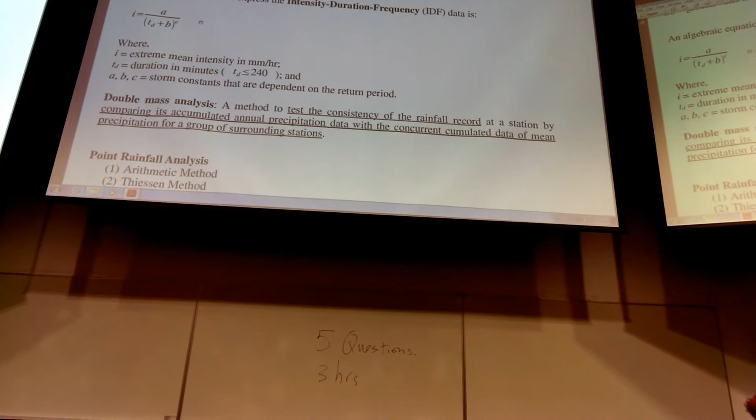For intensity, duration, frequency, that information is exactly from the DSD manual. Well, you don't have to worry - of course, you can write down this kind of equation again, or if necessary, I may also provide it in the question. The question is mainly not to trick you or to check whether you can memorize something.

The double mass analysis, well, we have it in assignment number 1. One thing I'd like to mention is that someone asked me, and I may have misunderstood your question, so I'll try to explain this, and later I'll show you the assignment number 1, how we did the calculation. But actually I marked some of the assignment number 1s, and there shouldn't be any problem so far that I can see.

So I think most of you are okay, but maybe some other students just copied and still had no problem. What I want to say is that we're trying to compare, to check each of the stations with the surrounding stations. But if there are, for example, 20 stations, you don't know whether within those 20 stations there's only one, or maybe 2 or 3 stations with a problem, or even maybe none of the stations have any problem.

So what I mean is, when you plot the cumulative curve and you see the slope change, okay - you can always use all the stations and do it one by one, or pick one, for example station number 1, and use the rest, stations 2 through 20, the other 19, to do the cumulative curve, and plot one by one. Then the next one you use station 2, and the rest to do the cumulative, and you see the trend.

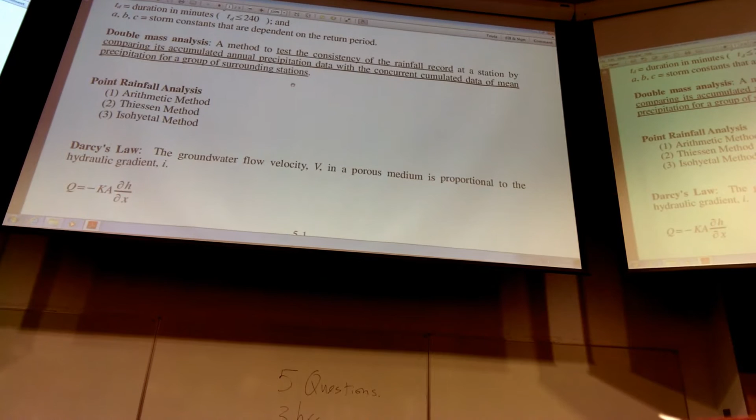18 are fine, and you just pick the one with the problem. Then you use the rest of the stations to do the cumulative curve. You eventually include the other ones with problem as the cumulative. But what you can do is plot all the graphs first, depending on how many stations. Like in our assignments where you got 5, you do all 5 first, then identify which one, or maybe 2, have a problem. Once you identify those 2, you don't use that data for the cumulative stations with data, so you can isolate the one that may have a problem. When I talk about the assignments, I'll show you again, but remember you compare with the surrounding stations.

Now this, well, it's hard to say. Anyway, remember how to make use of this method to find the average rainfall. So this, I cannot rule out.

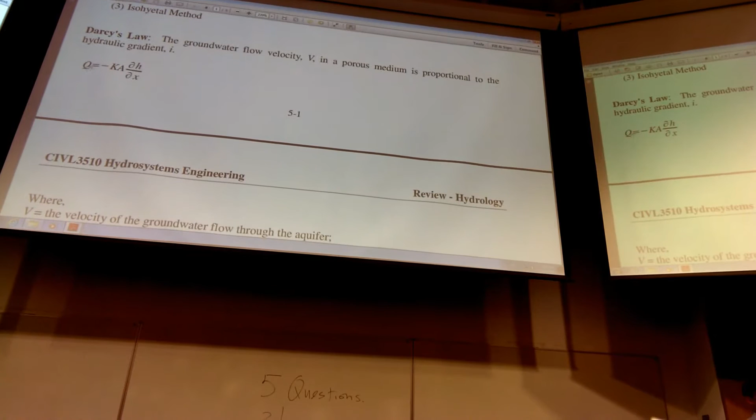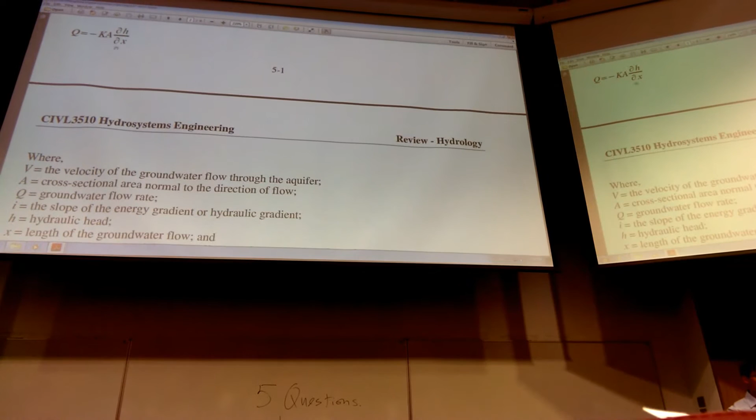Darcy's law is very important. This already includes the continuity equation, V times A equals Q. Without the A, so that is the energy head, the energy gradient, and that is the coefficient for hydraulic conductivity. Remember this negative sign, or sometimes we don't put the negative, depending on whether the head in the next stage, in the final stage, is smaller. If it is smaller, you put the negative sign to compensate for the negative sign coming out from here, since it's decreasing. That's why we put the negative sign.

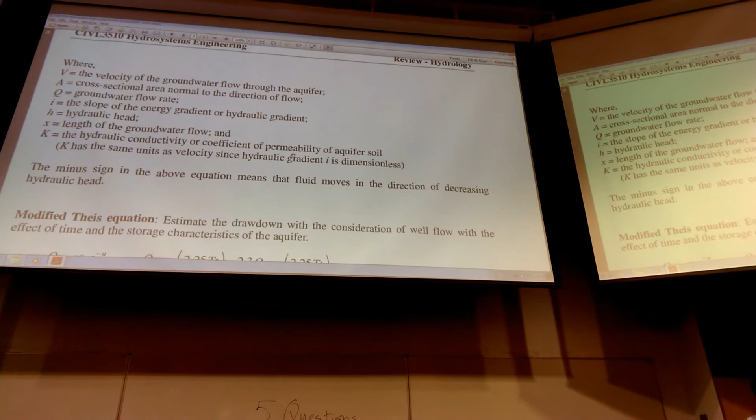You need to review all this, and remember we have different names for hydraulic conductivity or permeability. If you just get used to one term, and in the questions you're given the term 'permeability', and you don't know these two actually mean the same thing, you may have a problem.

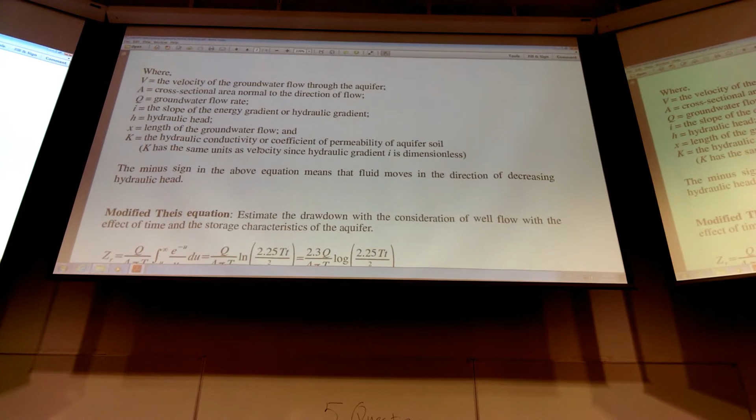Also, the other thing is the unit, the units of some of the coefficients. It's better to just make it clear. I don't write it down here, so you need to refer to your notes. That's the reason I just play it safe, that everything's in your notes. And more than that, you should do some outside reading.

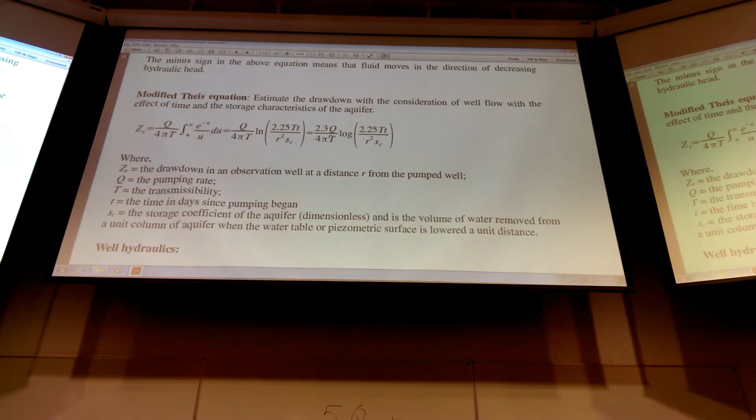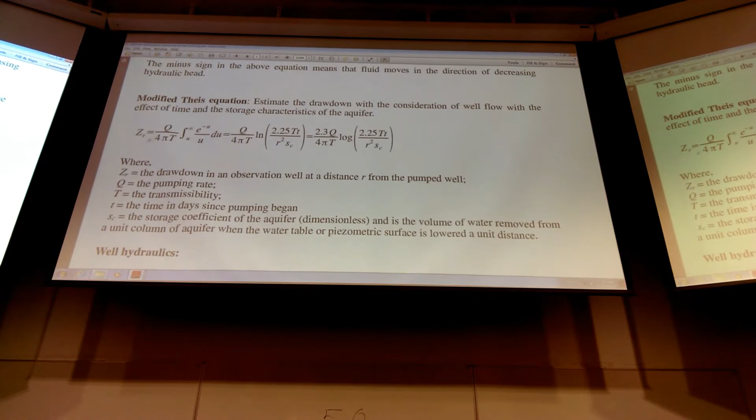These equations estimate the drawdown and how it's related to the flow rate extracted from the well, and also the time. Mostly we use this to estimate, given a certain amount of time, with this specific flow rate, what would be the drawdown. Or maybe you can only allow a certain drawdown, and you want a certain flow rate, and you need to know how much time, or when this will occur. So we use this part of the equation.

In well hydraulics, mainly the confined and unconfined cases, you just write down the equation, remembering that from the tutorial, whether you have 2 observation wells or just 1 well. At the boundary of the well you get 1 boundary condition, and the other boundary condition can go to a certain distance away from the center line of the well, where the drawdown is almost 0.

But of course, when we derive this, we assume that at a very long distance, approaching infinity, the original groundwater surface won't go down. But if at a distance of about 500 meters or 1 kilometer away from the extraction point it's already not affected, then you know how to calculate or define the depth of the drawdown, or the depth of the groundwater.

The other thing you need to worry about is the unit. This should be the SI unit. Again, as I mentioned, I won't ask you English unit questions. If necessary, I'll just change it, or I will only ask the question using the SI unit. But again, you need to know the most fundamental, simple conversions.

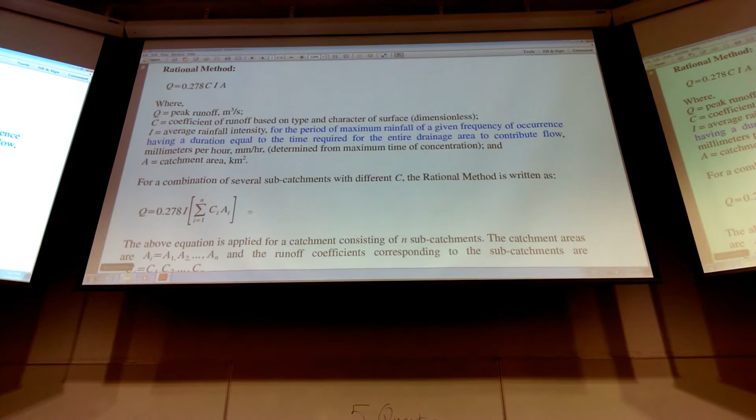These two equations you can find in the notes, and also in the DSD Stormwater Design Manual. So just think about how to use it.

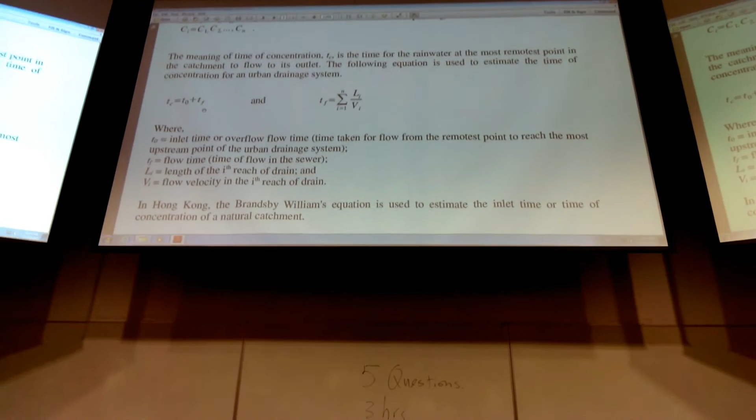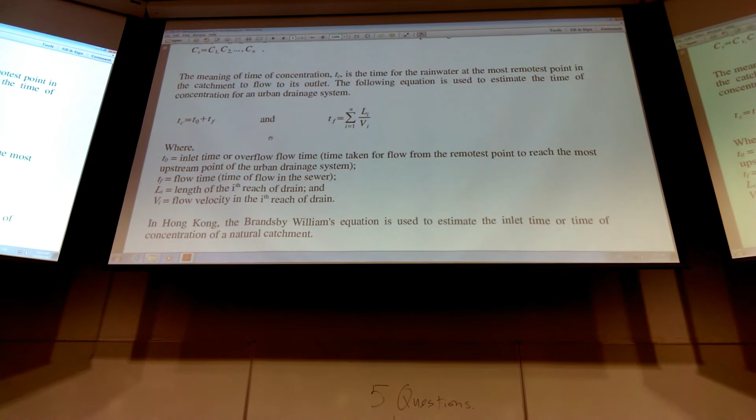It's a very simple relationship between slope, velocity, and n, if you are given the minimum velocity, for example 0.75 or 0.8 meter per second. Then you need to satisfy that. You can start with that as a condition when you do the calculation, then change the slope using the Manning equation, and define the Manning n, which is usually given for different conditions.

And the time of concentration. Remember, I spent a little time explaining this, the rainfall intensity, but that is related to the time of concentration. Quite a number of you came to ask and clarify the concept. So remember, the most remote point - how much time does it take for a drop of water from the most remote point to reach the exit.

It takes a certain period of time, depending on the topographic condition, and whether it goes into the pipe, then to the manhole, then another pipe. So the flow time and the overland flow time altogether - anyway, you get the time.

That time should be the longest, amongst the catchments, or if you have a number of smaller catchments. So that time we equate to the duration of the rainfall.

If you know the duration of the rainfall using the intensity-duration-frequency curve, then you can find the I. You can find the I.

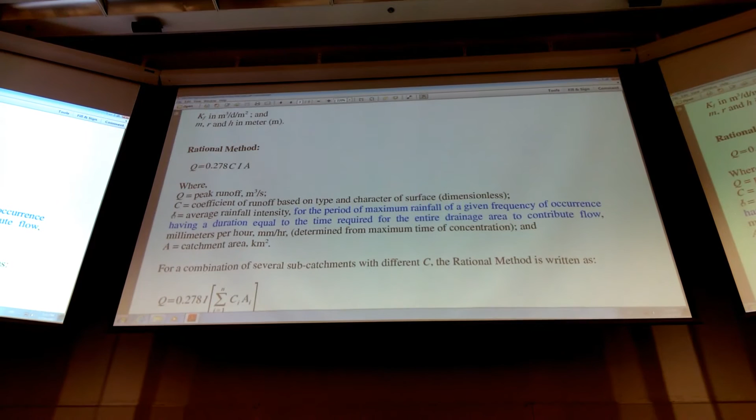But the main idea is that we equate the time of concentration and the duration of the rainfall. It means that over that period of time, we just assume the same rainfall intensity occurs, constant rain distributed on the whole catchment.

So then you get a more conservative result for estimating the flow Q. Think about it: if it takes 30 minutes from the most remote point to the discharge point...

But the rain only lasts 15 minutes, just half. If you use 15 minutes to estimate the I, then it will be different.

And the other thing is, if it really rains over 30 minutes, even longer, then the most remote points have already contributed to the exit point. So it doesn't really matter if it continues to rain for 1 hour or 2 hours - if everything else is the same, then the same amount of flow will arrive and contribute to the outlet point.

That is the main point. That's why we equate - we need to find the time of concentration first, then make it equal to the duration of the rainfall. Then you find the I - that's the main idea.

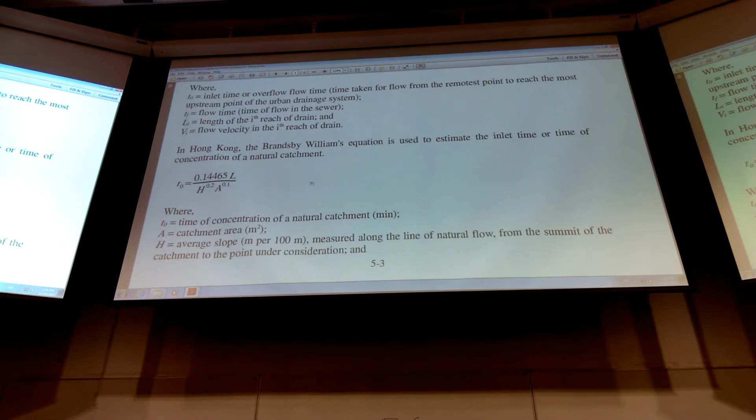These equations you can use for a catchment with a given length, slope, and catchment area, to give a rough estimation of the time of concentration. It means you go to the inlet point.

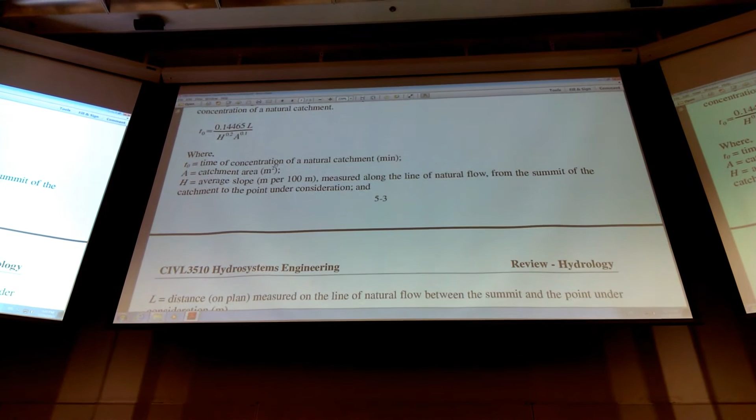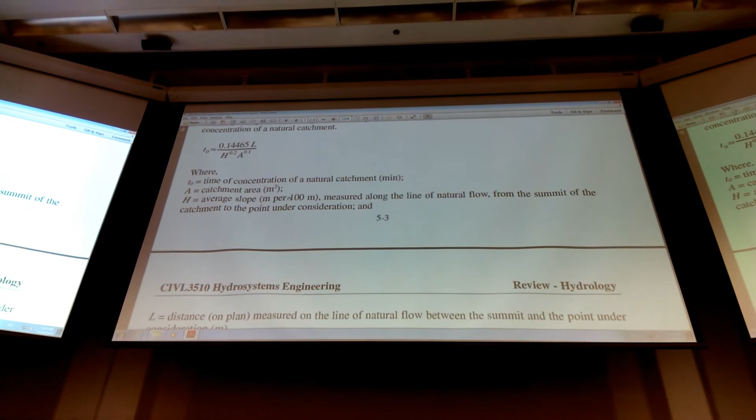But once you go to the inlet point, you also have the time of concentration if you have a composite or different small catchments, and you use a number of pipes to connect them together. Then you still need to identify the outlet point and the total time of concentration.

In the case that you get a set of data, or are asked to calculate the return period or even frequency - we have a list of rainfall data, for example over 50 years: the largest one, second largest, down to the smallest one.

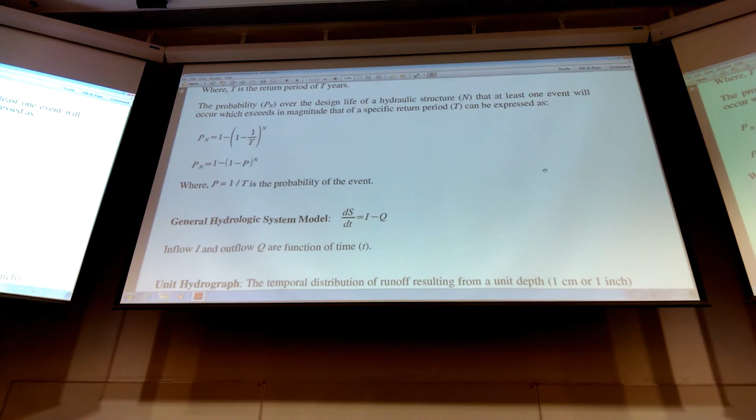Now, according to the DSD manual, you can probably identify the locations for your design. Then maybe you can select a 50-year return period or 25-year return period. You may be required to apply an equation to calculate the return period. Once you have this return period, then you use the IDF graph to find the rainfall intensity. In other words, you are not given the rainfall intensity directly.

I just want to show the figures - the rainfall intensity figures - showing the time, the durations, and the rainfall intensity.

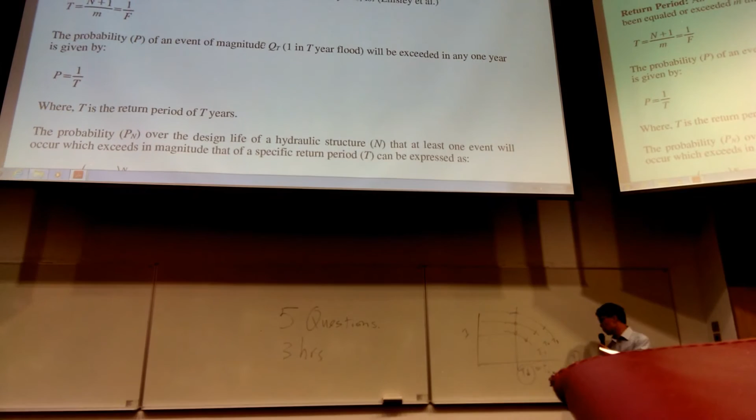There are different curves, remember, for different return periods T1, T2, T3. What I want to say is that I just asked you to do the calculation, but the return period is not given. Then you may ask whether you use this curve or that one, even though you know the duration equals the time of concentration. So you will ask whether you use this point or that point. Then maybe you can use the given information to calculate the return period.

Now, for the case where we have 50, 35, or somewhere in between - just like when you use the Moody diagram - you can approximately find the value. If it is this one, then you find it here, and find the rainfall intensity. Then you can carry on to use the rational method.

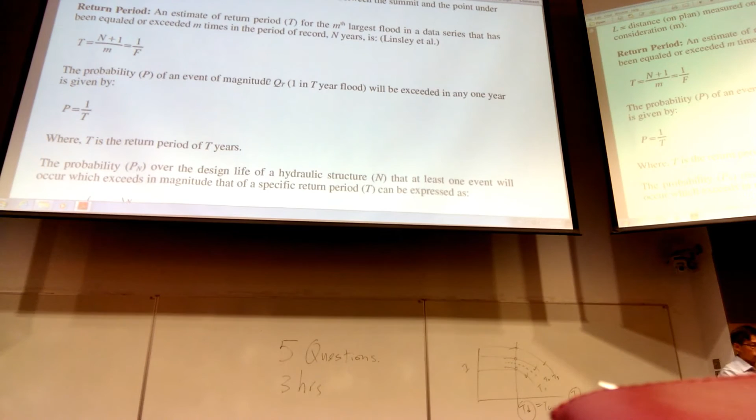Now for the unit hydrograph - I don't include the table here, so you just need to know how to derive the unit hydrograph. The unit hydrograph is related to the time interval. So if you get flow data with a time interval of 6 hours, then what you derive is the unit hydrograph for a 6 hour interval. If it is 2 hours, then what you derive is for a 2 hour interval.

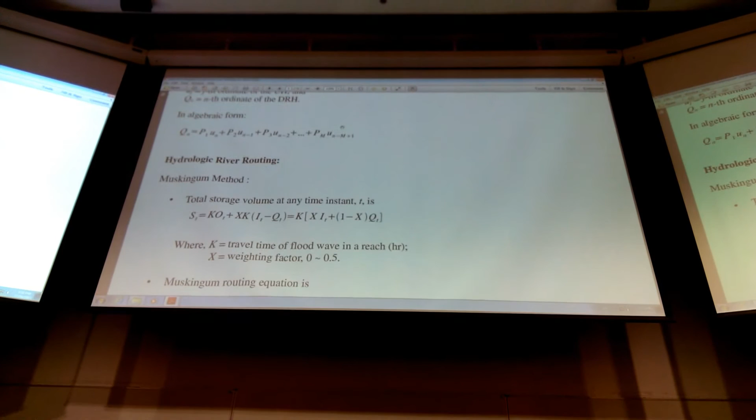Then, when you apply it in a later case, for example using the unit hydrograph to derive the direct runoff - we have the example - you need to match with the time interval, for the direct runoff hydrographs. It's also required that you review this.

As I mentioned, for the river routing, remember all the equations. Just check and make sure you write the equations correctly - don't miss out anything. How to find K and delta T.

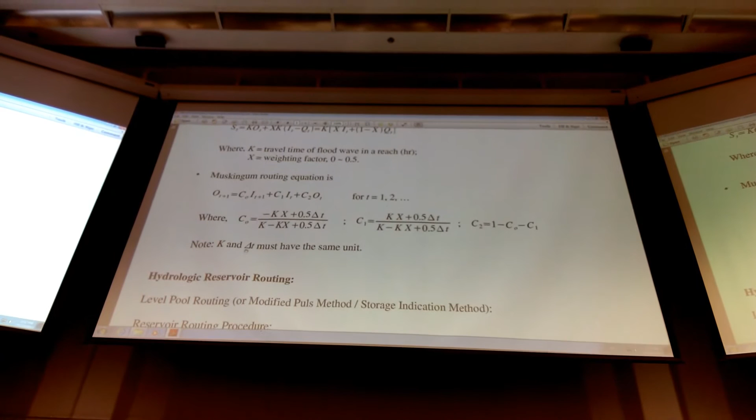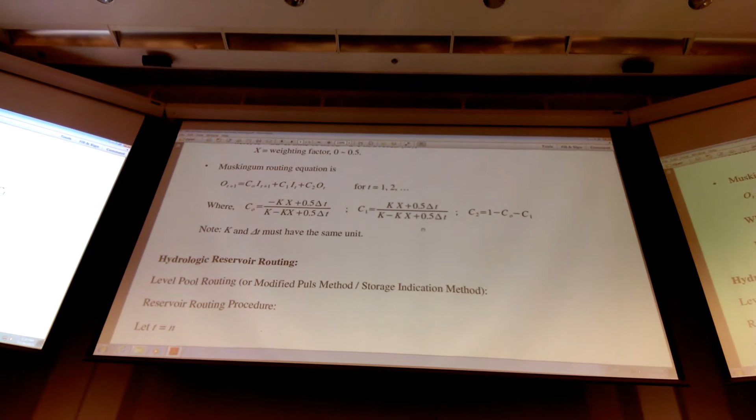So in your assignments, most of you actually did quite well, so there shouldn't be any problem. I will go through that. And for the reservoir routing, remember all those equations - mostly you need to use the table to work out the result.

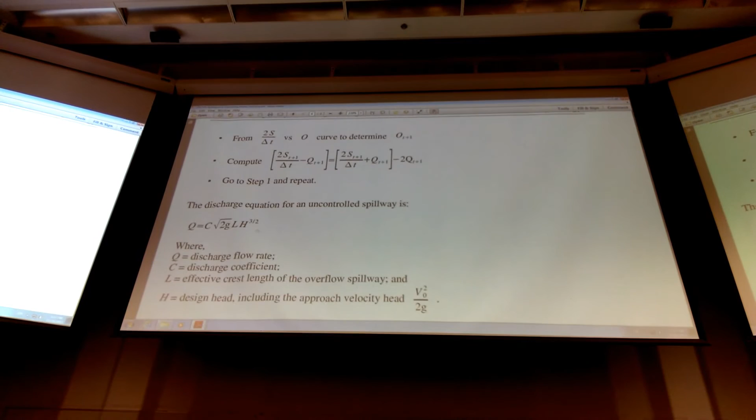For the discharge, I also include one equation here. It doesn't mean the other equation is not important, because this one shows you the stage - the flow rate and the depth. So maybe you are required to use this information to link with the reservoir routing. Remember how storage relates to the water depth, and how that relates to the outflow. You may also require this information as well.

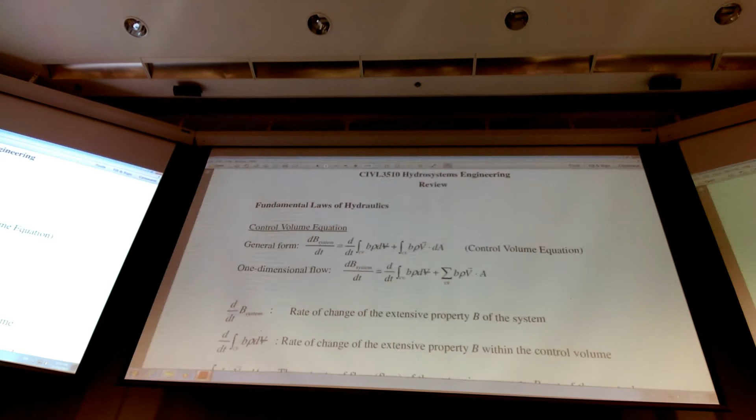For the hydraulics, I will ask questions that are more practical rather than too theoretical. Even though the examples included in this chapter on the fundamentals of hydraulics look a bit complicated, the reason is simply because of the unsteady term.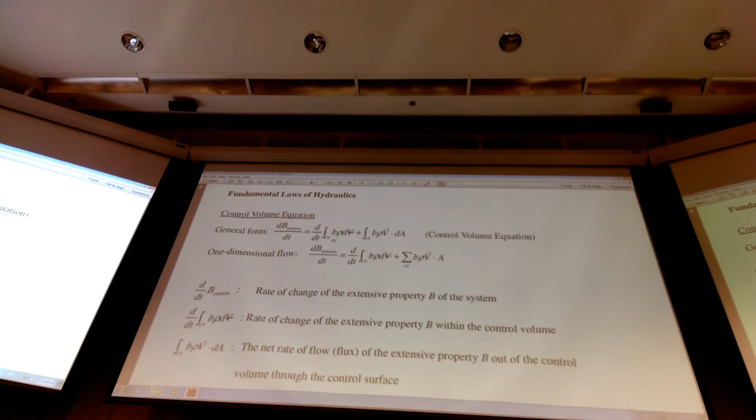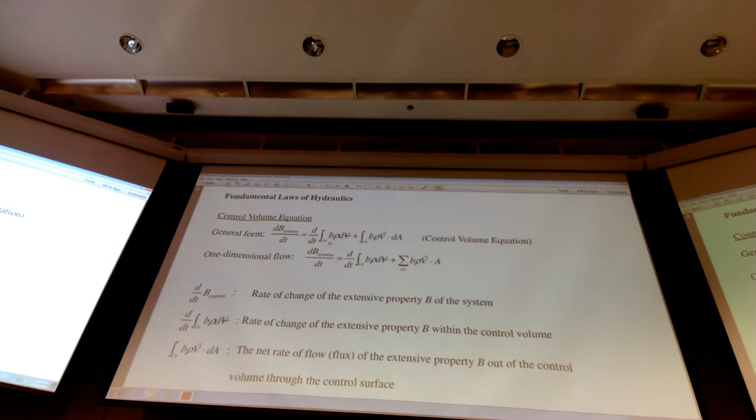But when we do the real application - pipe flow, except for transient flow - we can, to a certain extent, consider it steady. Can you remember that once we design the control volume, which moves at the same speed as the wave or the pulse, we change it to a steady case?

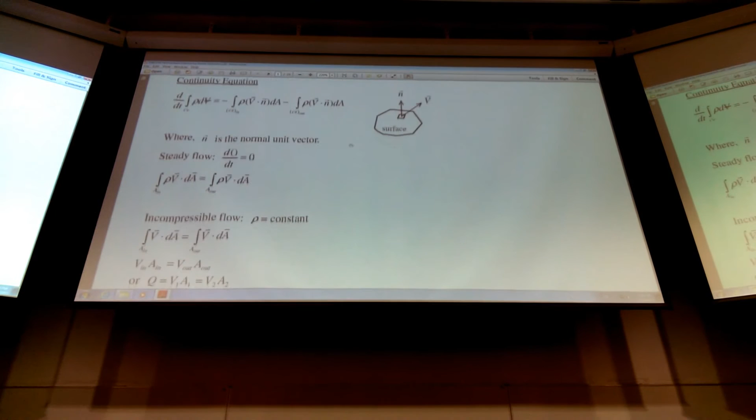So mostly you deal with the steady flow situation, pipe flow or open channel flow. But still, I think you should also review this chapter - write down all the equations, the continuity equation, which eventually reduces to a very simple form, and the momentum equation as well. I mentioned to you, just by this example, that I'm not going to include this in the version I upload to the campus.

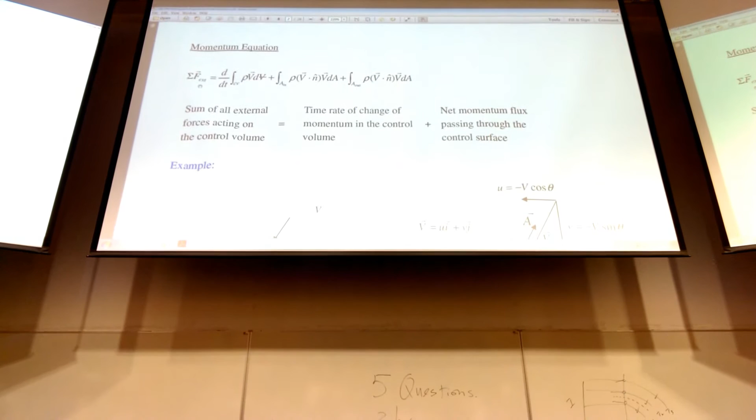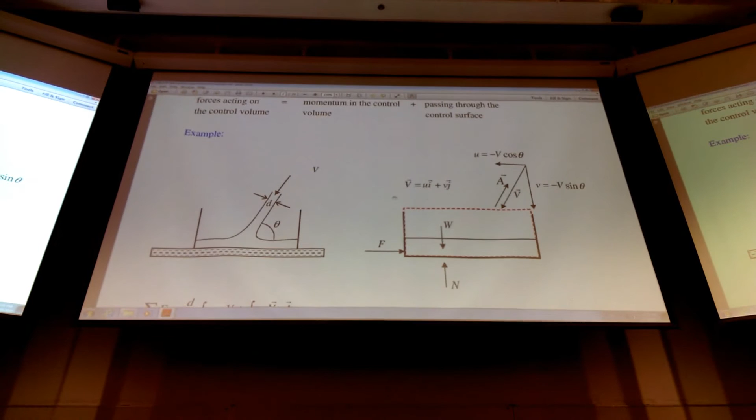This one I already explained to the class, so just a reminder, I'm not going through it in detail. The two we have here: one is related to the total mass flux, and the other is related to the direction of the force. This example demonstrates that if you consider the x component, there's a velocity v component in this direction. But when calculating the total mass flux or total flow rate, you don't need to use this component. Remember, this is to remind you of the momentum equation.

The energy equation is very useful. Remember the pumps, whether we have a turbine, and the correction factor. I won't ask you for cases requiring a different correction factor, so you can just assume it's equal to 1. But for real applications, remember this is not the only equation you universally apply, so you've got to be careful if the flow is not turbulent but laminar.

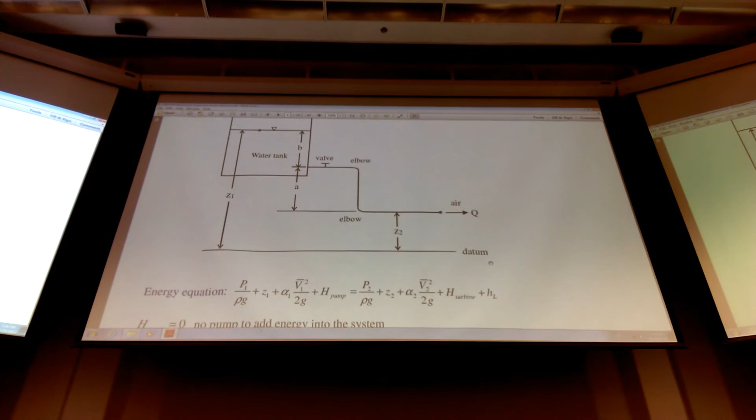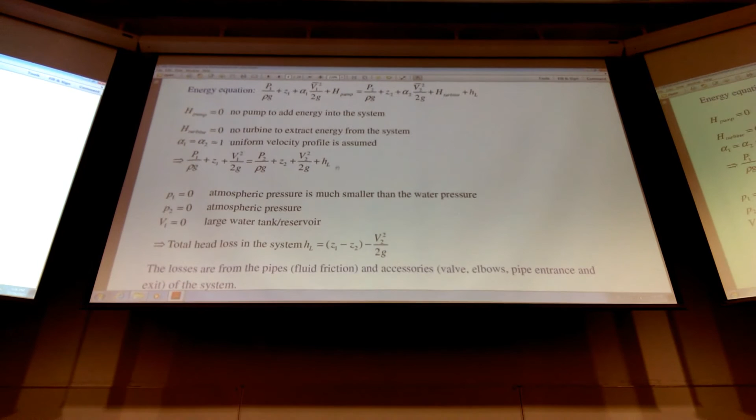Another example is dealing with pipe flows and valves, so major losses, minor losses, and how you apply these equations. Remember I emphasized here and outside, the atmospheric pressure. So when we deal with the energy equation, what kind of pressure do we use? We use gauge pressure, which is defined relative to atmospheric pressure. Now for this case, can you draw the hydraulic grade line and energy grade line? Can you also analyze the pressure inside, identifying the lowest pressure point in this case?

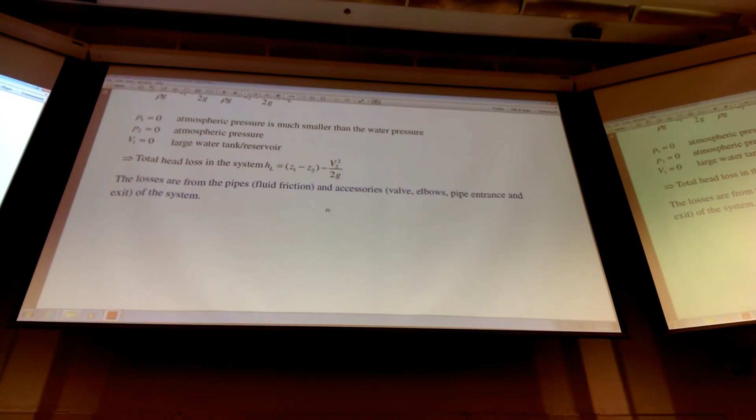So then, minor losses, major losses also. Now just like this—well, because I copied this from the book, so I cannot distribute it to you. That is the reason why I will take this away.

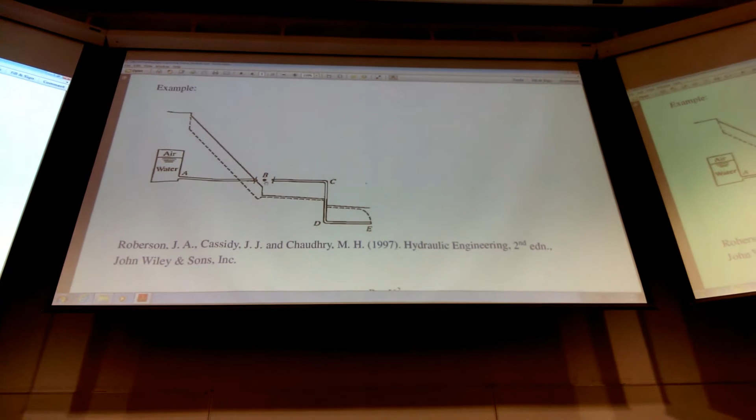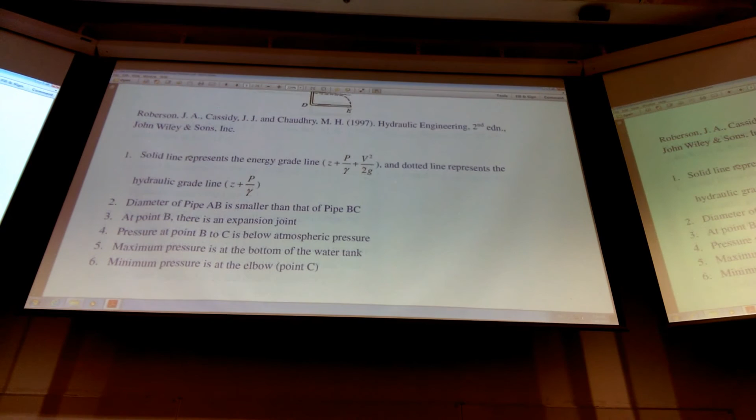Now you see this example drawing the energy grade line and hydraulic grade line. If you remember, these two have the same distance separation, and these two also, but there's a point B here. So what happened to point B? Why is the difference between the energy grade line and hydraulic grade line reduced? And why does this hydraulic line connect to the exit here, and why is there a drop here? The solid line represents the energy grade line, and the hydraulic grade line is the dotted line.

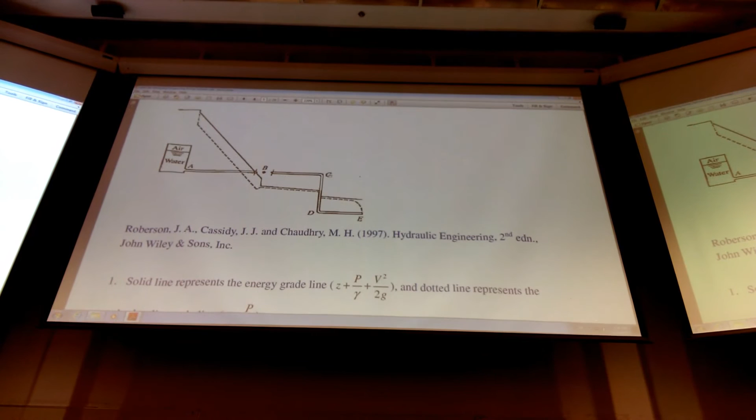At point B, there's an expansion joint. What is the meaning of an expansion joint? It means the pipe in AB is smaller than the pipe in BC, so the pipe diameter enlarges. With a steady flow rate Q, the velocity V is reduced. That's the reason you see these two lines with a difference not as much as these two. You may not be asked in some questions to calculate the energy grade line and hydraulic grade line, but you may be asked to explain why the line would look like this—what possible cause makes this happen.

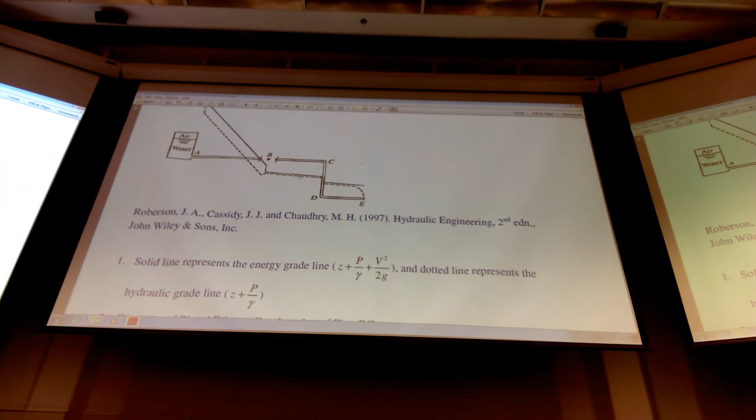Now the other point is, where is the maximum pressure, where is the minimum pressure? For this one, the minimum pressure is at C, and why is it C? Without seeing the answer, can you identify the highest pressure point and the lowest pressure point if we change this sketch, but still provide the hydraulic grade line and energy grade line?

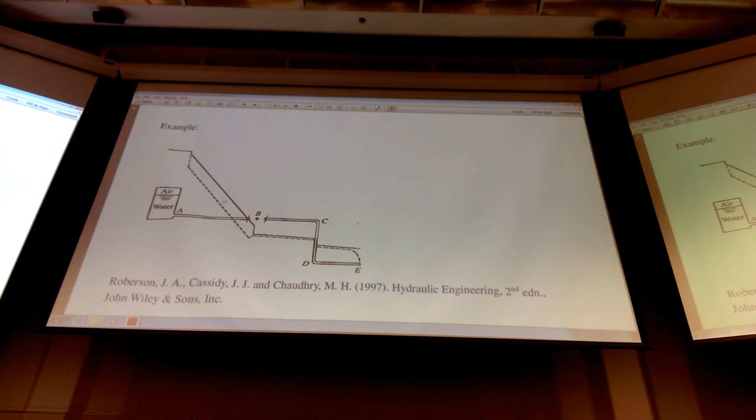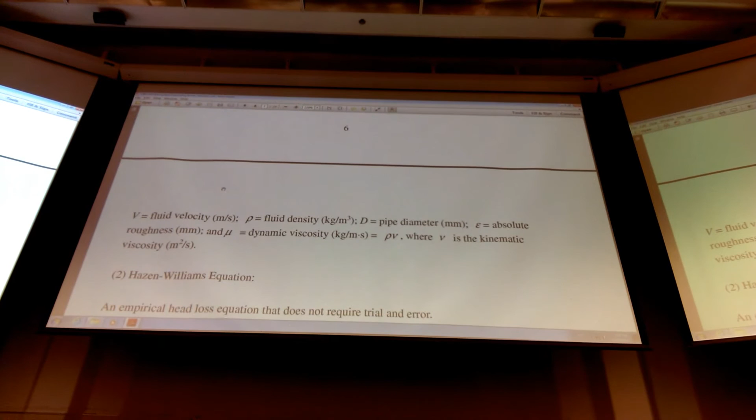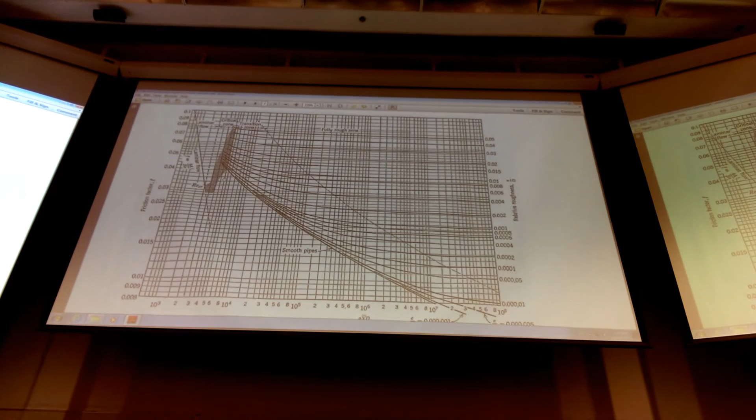The branch pipe systems—it's very easy to make up different pipe works using different numbers of reservoirs or tanks, and then prepare a question like this: what is the junction point, what is the elevation, and what's the flow rate?

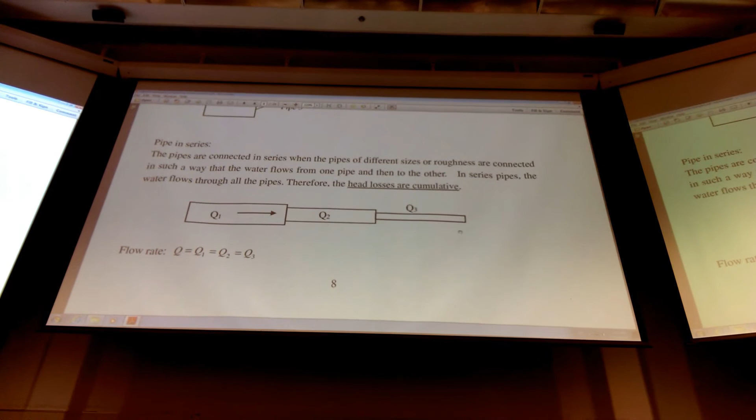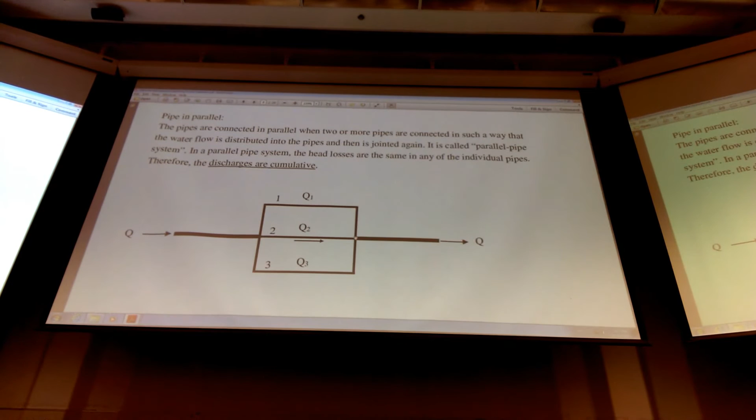Now the other thing is, when we have pipes in series, the flow rate needs to be the same, but the head losses are accumulated—because of the different names, you probably know it. But when we have pipes in parallel, the flow Q1, Q2, Q3 add up together to become a total, but at this point and here, the head loss will be the same.

Then we apply this concept in the pipe network, and I think you did it in the assignments, so this equation you need to write down. Although I do not guarantee there will be questions to calculate the pipe network in the exam, just write it down—just write down the equation.

So the pump, okay, now this is important. How to find the operating point. You can use the graph.

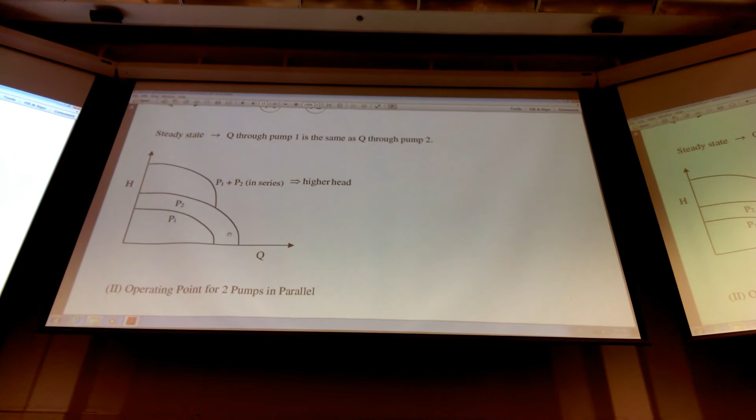The efficiency, so pump in parallel, in series, you can also write down this curve, this graph if you want, and write down the point of what is additive and what is the same in parallel. For this graph, calculations I think are not that important in this case, but you can again write down all this equation, you just need to understand under what situation the calculations may occur.

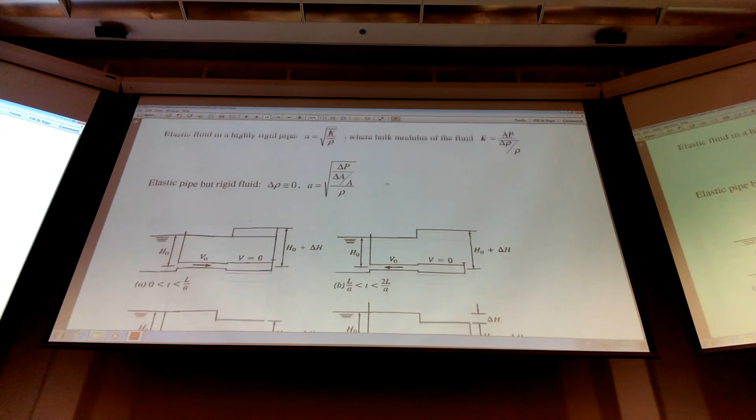Now the water hammer, you better write down all these equations too. I will upload it. And now remember these four figures.

Now again, same as the lecture notes, you see this curve up and down. Now this one is actually asking about the pressure at this point at the gate valve.

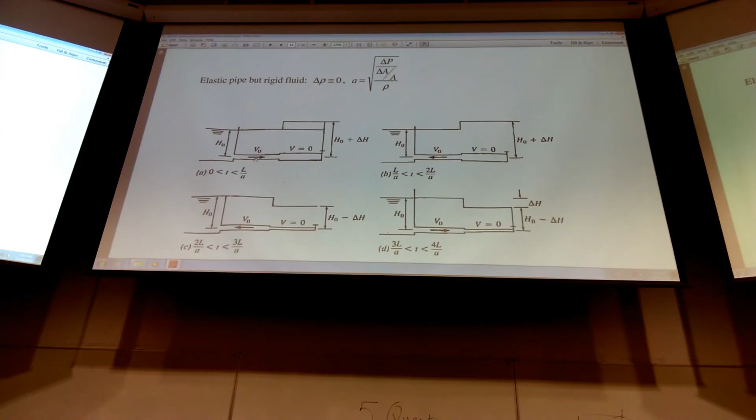So remember that it's not necessarily exactly the same. This only applies to the case when you are asked about the pressure at this gate, and then you just prepare maybe some questions to ask about different locations.

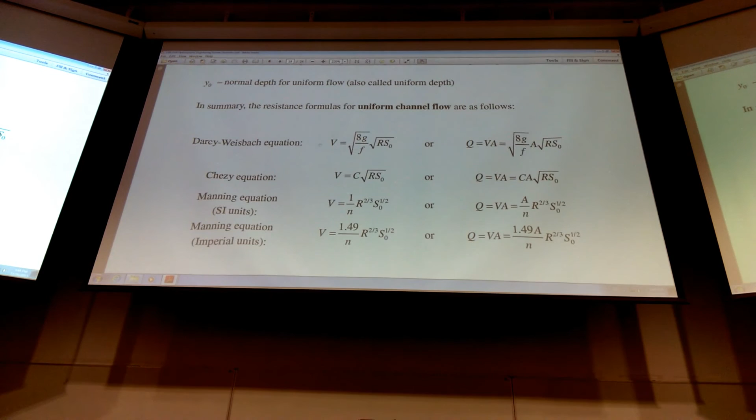And this one will not be included. So the open channel flow, also things, and the Manning equations, just write down the equation you need. You need to know how to apply it, and how to sketch the energy grade line, hydraulic grade line for the open channel flow case.

For the open channel flow case, you may need to do the calculation first, and then there may be a final mark requiring you to sketch this hydraulic grade line and energy grade line.

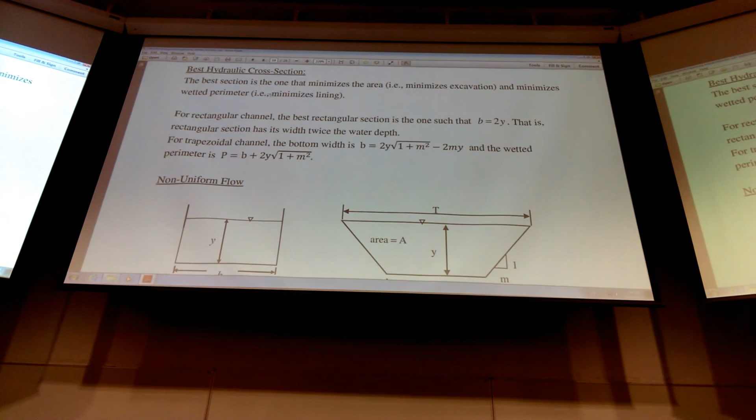Now the best hydraulic section, remember. So you know the case for the rectangular channel, but I don't know whether you tried or went to the internet to find the case for the trapezoidal channel. That is related to the side slope. You can always find it, or derive it yourself - the best hydraulic section.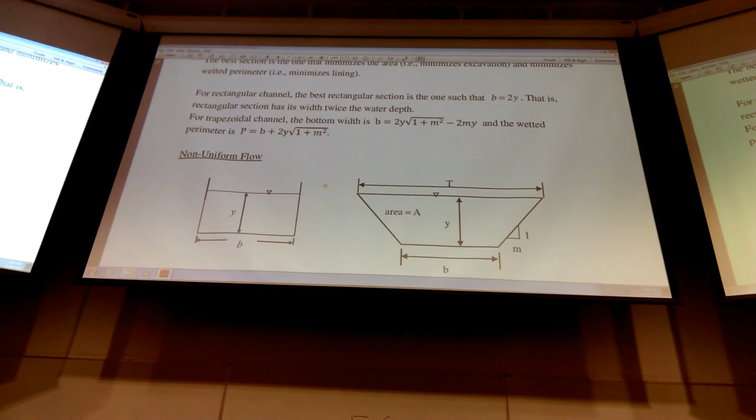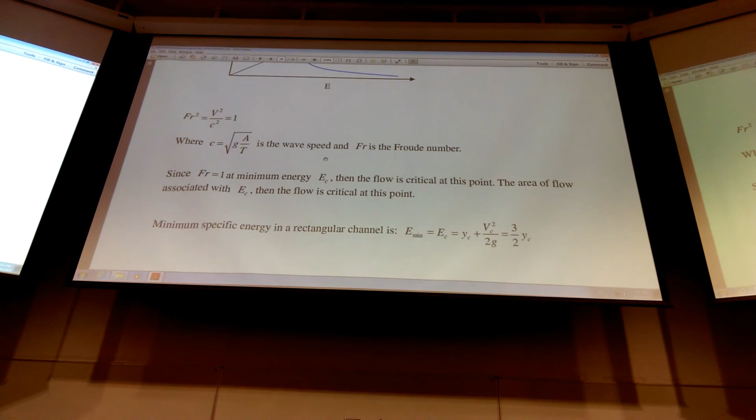So the other thing is non-uniform flow. Remember this, very important: specific energy. How to calculate the Froude number, and also things like that.

Now the profiles, okay, M1, M2, M3. You can find it in the notes. S1, S2, S3. Now this one again you can find from the library, the book.

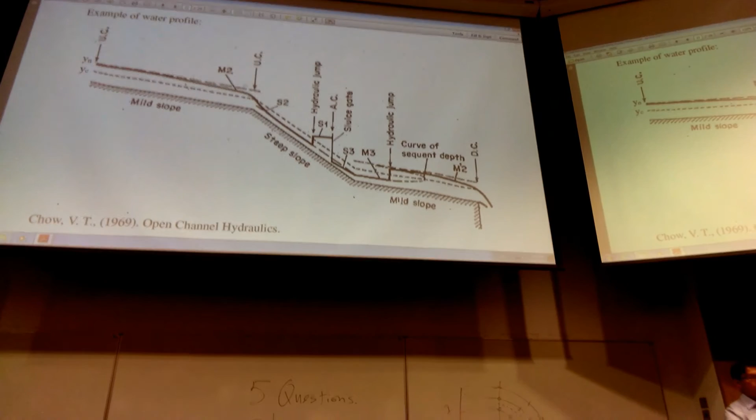So if you are given the line here, okay, this line, the dotted line here, so the normal depth, critical depth, you are asked to identify the flow, the profile. So the mild slope, steep slope, change to mild slope, there's four here.

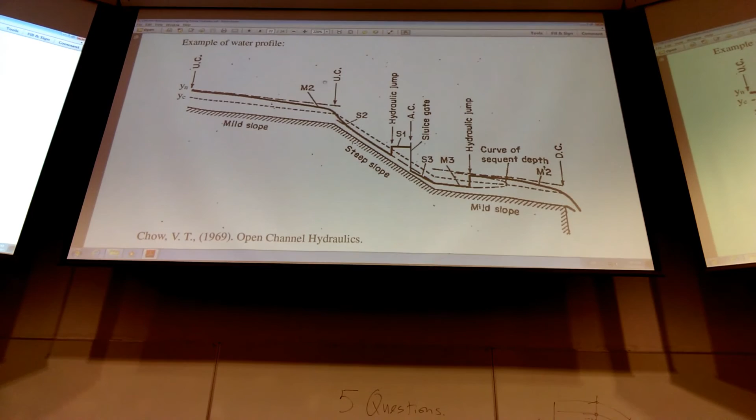So then you need to identify that this is a change from mild slope to steep slope. So we have the M2 connect to S2, remember?

And well, when there's a case here, we have the sub-case which is lower than the critical depth, so you have the S1 here, and then the hydraulic jump. And the other case, hydraulic jump, M3, M2.

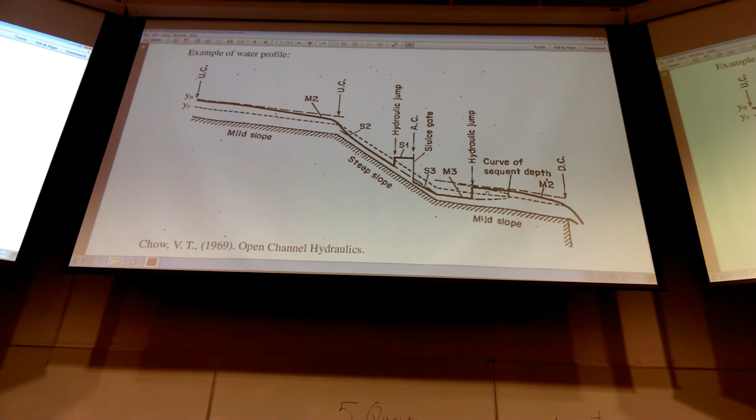Now the other thing you can remember, I told you already, the flow rate is steady - it doesn't change. So for different slopes, you will have different critical, different normal depths.

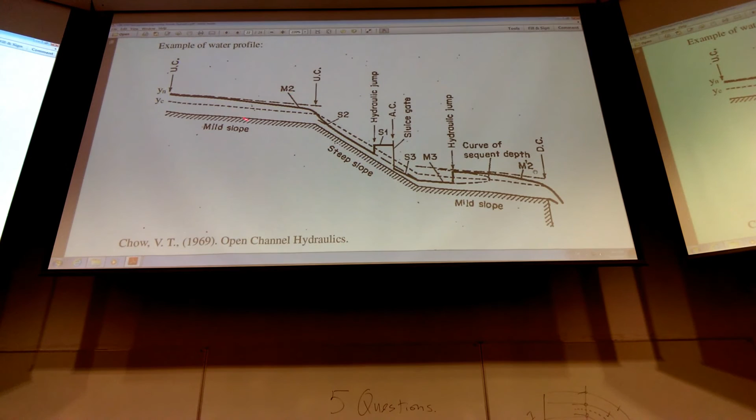But the critical depth is always a constant, always a constant, so the distance from here is always constant. Because if you just check the equations, the critical depth is only a function of the flow rate. So unless you change the flow rate to another case, the YC won't change. So remember this.

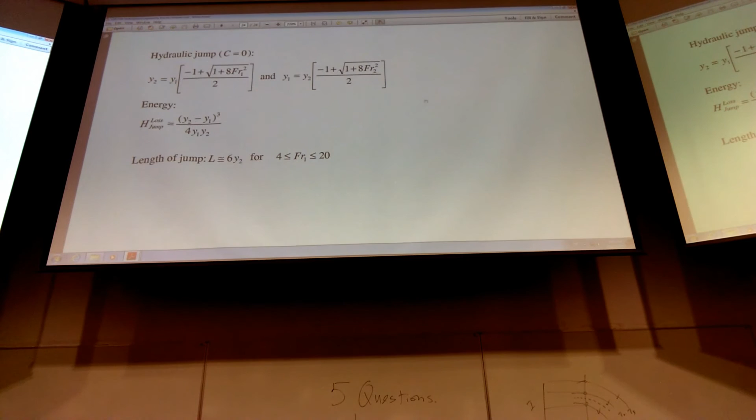Then that one is the direct step method. So to calculate the distance, you can write down this one. The hydraulic jump, that is the hydraulic jump, but that is the theory and the equations that we eventually come up with - these two equations, okay, and also the energy loss, this sort of thing.

For assignment number one, I don't see any problem with many of the submissions. For the 5 stations, well, it depends - you may not necessarily get the same result as me. I also find that the calculations from some students, well, many of you used the summations of the 5 stations, so that's fine.

As I explained, you can identify which station has a problem first. In this case, it's mainly station number 1 that has a problem, but in the case that maybe station 3 also has a problem, then when you work on station 1, you still consider station 3 in the summation as well.

As I said, you may do the screening first, whatever you use, all 5 stations or just the rest. Do a screening first, identify maybe 2 or 3 stations among the whole group that have problems, isolate them, and don't use them in the cumulative result.

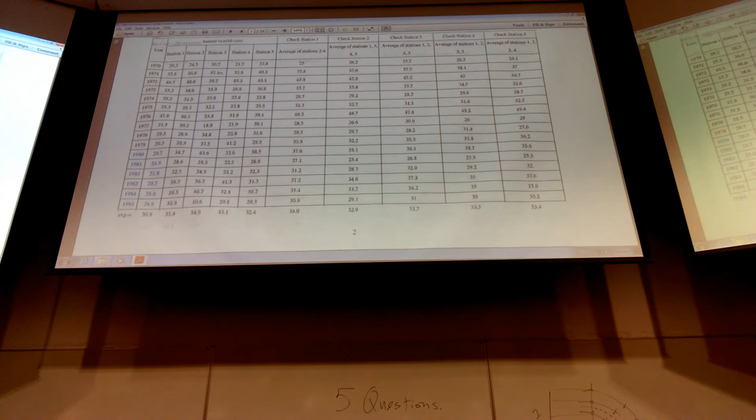So when you plot it, you find mainly station one shows some deviations, while the rest are still more or less a straight line when you calculate the cumulative annual rainfall for all stations. That is the remaining station. So someone identifies 1977, someone 1979, someone identified 1978 - still fine, okay?

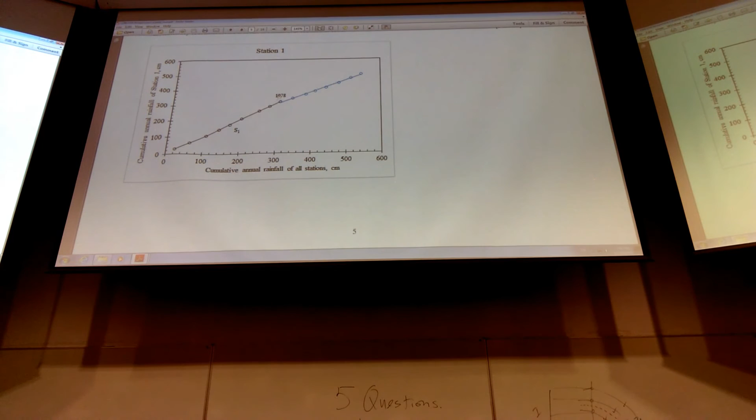Sometimes it's a bit difficult to tell, and the other thing is when you calculate the slope, I also see some difference - not very big, but eventually when you come up with the ratio and adjust the result, the result will be a little bit different. Someone calculated 34 or 30-something, I cannot remember, but still, that is not the point where I deduct marks. You just calculate the average.

For question number 2, most of you have no problem. Just quickly go to the point x equal to 0.1 and then calculate k. The k's are almost equal to 3 days.

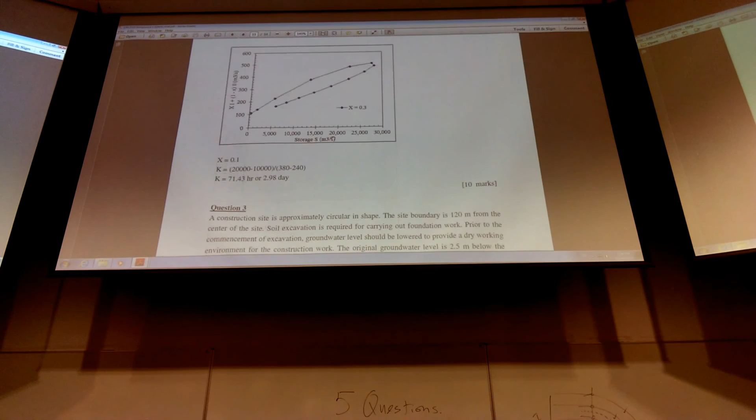For question number 3, I think most of you are correct, but I found a careless mistake where someone wrote the result equal to 0.071 - a zero is missing, maybe a careless mistake. For part B and 3, the x and the hydraulic gradient, there shouldn't be any problem.

For this one, you did it a very simple way, but the answer is still correct - you used geometry to do the calculation, nothing wrong with it. But if you see my answer, because this one is like a triangle, we have two triangles combined together, so you can use geometry.

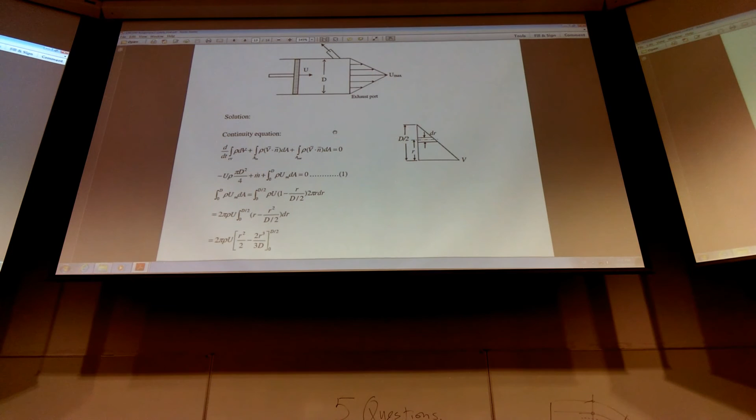But if it is not a triangle - say I give you a certain profile that's a curve - then you may not be able to use simple geometry to calculate this area to estimate the mass flux. In that case, you take a small change, go from the center to a point R, with a small change dr, and together with 2 pi r, you calculate the area. So you should use integration to do it.

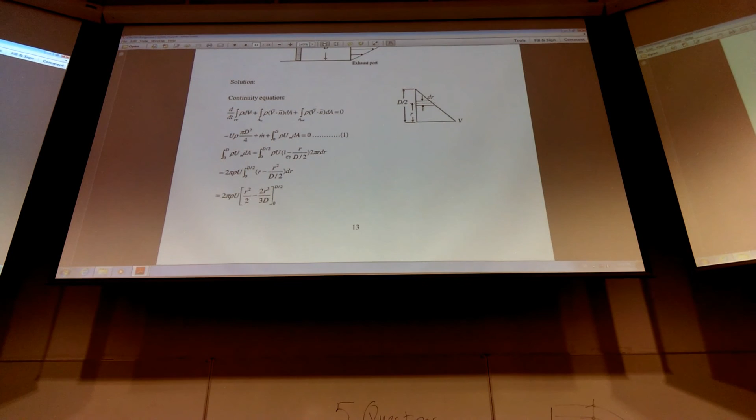But anyway, you did it correctly, no problem. I just remind you that for other cases, if the geometry is not as nice as this, then you need to use integration. Eventually, everybody got 1.19.

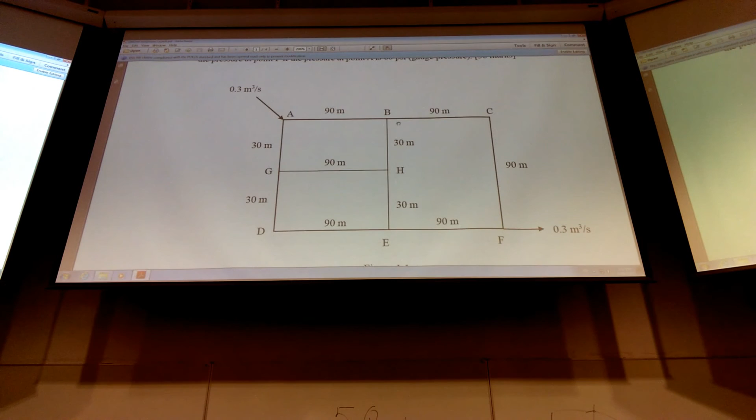For question number 2, it depends on the iterations that you use, and you all submitted it, right? I'll show it to you later. The result may not be exactly the same as mine, there may be a little bit of difference - it depends on how many iterations you do. And the directions depend on how you define them.

But anyway, when you finish the calculation, you should be able to check whether it satisfies the continuity equation or not, and satisfies the energy equation. If it satisfies these, it means your result is correct - you don't have to check with my answer.

For question number 2, it's pretty much straightforward for part 1. Now the thing is, we changed from a rectangular channel to a trapezoidal channel. The point is, anyway, use the critical flow conditions, because when it comes here, the critical flow conditions occur.

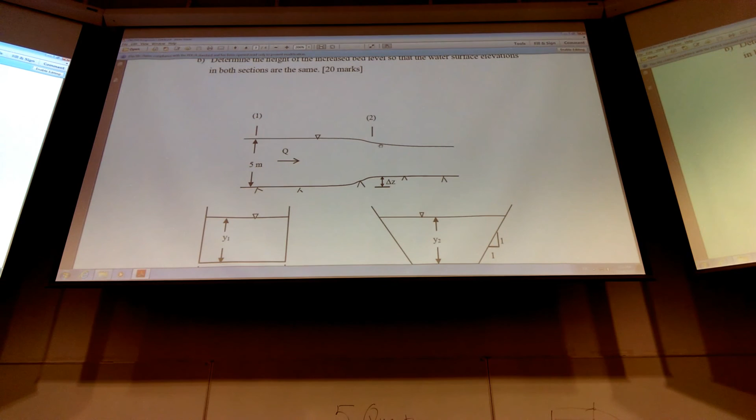Remember to be careful when you calculate the critical flow depth. You can calculate the normal flow depth and then find the difference. For part B, you don't know how high you rise, so the data is set here, and then just add up the water depth, so it will be fixed or confined by 5 meters.

Then you just plug into the specific energy equation, and then you can calculate this - about 1.34.